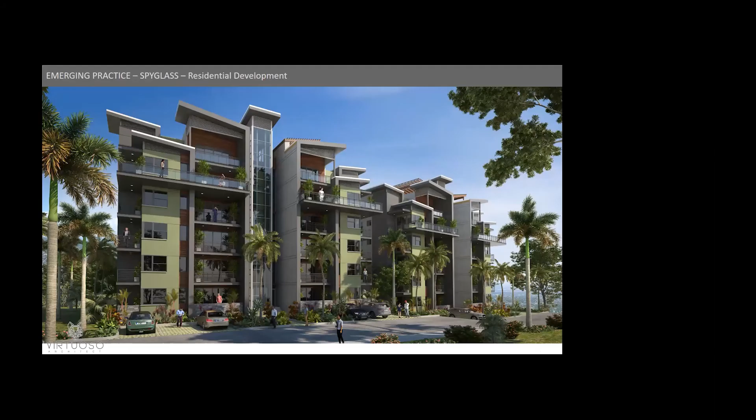This is Spyglass Hill, in the Barbican area, top of the hill at Tavistock. It consists of apartments and townhouses. A very dramatic project, and I can't wait to see the end result. We know it's going to be really dramatic, and pushing the envelope sometimes is something we like to do, and we're not afraid to do it.

This is another view of Spyglass Hill, now looking at the townhouses. The townhouses are the element on the front of the hill, and the apartments are towards the back. For the most part we did a lot of site sections, because the apartments are 6 stories, but we wanted to position them so that from the road you won't be able to see them in the back, only the townhouses.

So it climbs up the hill quite dramatically. You'll see the townhouses, which are 2 stories, but you won't see the apartments towards the back. It took us a lot of leveling and meeting with the engineers, really trying to work this thing through, because we didn't want to overpower the neighbors, number one.

So the townhouses flank the edges. The townhouses are what's against the neighbor's boundary, while the apartments are about 80 feet away from the boundary. From the road edge, you won't be able to see the apartments because they'll be hidden against that slope, hidden behind the townhouses.

We also tried to make the colors natural. We took some photographs and looked at the combination of green on the hill, and that's what we used to generate the colors. Yes, the colors may change at the end of the day, but this was the original concept, and I think for a massive project, we're able to nestle it into the hillside.

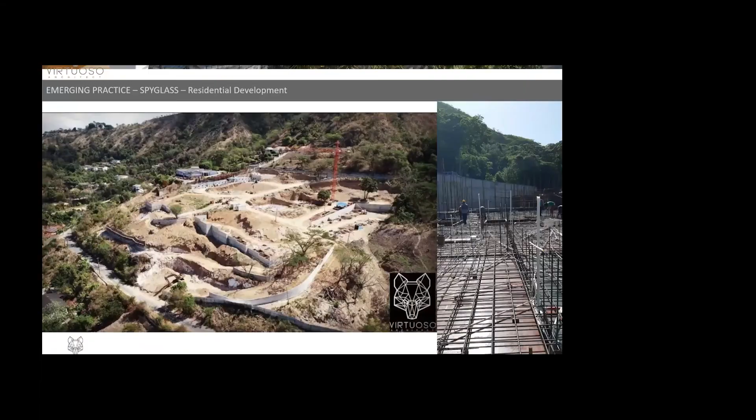This is a very dramatic view of the project, so you can really get an idea of the scale of it. But at the end of the day, once everything is finished and complete, we know it will be exactly what we want.

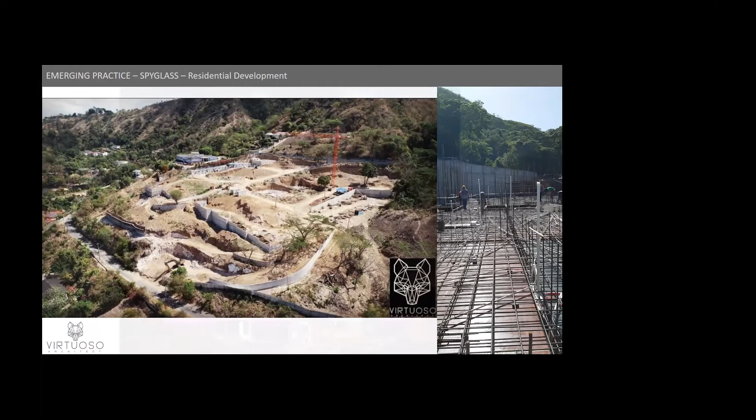This is our project that I'll be focusing on today. This is Belmont One, located in New Kingston, currently under construction. Here's another view of it.

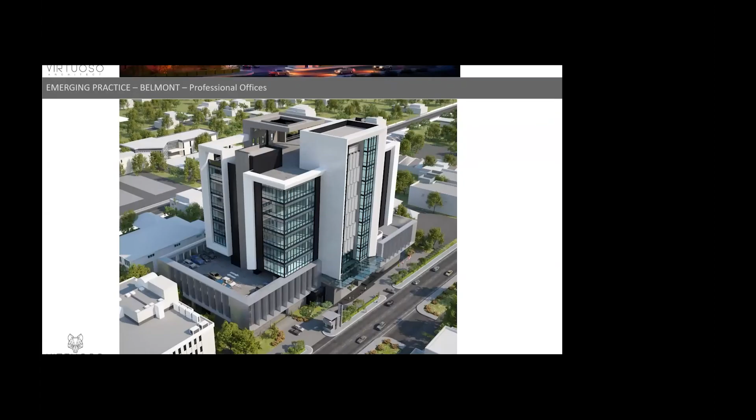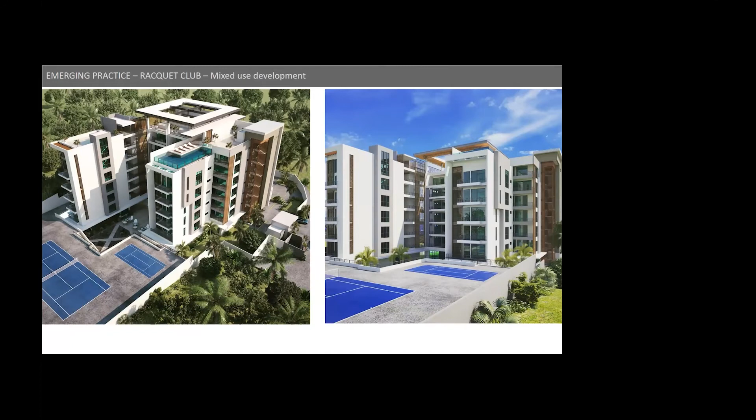This is a project which will be located in Montego Bay. It's called Racquet Club, and it's a mixed-use building, one of probably the only mixed-use buildings we have right now. So it's an apartment complex, 8 stories high, and it will consist of spas, gyms, shops, and other features. So it is Racquet Club, located in Montego Bay.

All right, so let me jump into the feature project, which is Belmont One, a commercial office project. Let me just give a bit of overview, and then I'll run through it.

Initially, Belmont was envisaged as a mixed use, consisting of both apartments and commercial offices. After the first design concepts and value engineering, the project changed to commercial only. Part of the reason is, by this time it's COVID time, we're thinking about dollars and cents numbers. Apartments are more expensive to execute than commercial spaces because you can do those as shells. So once we looked at all of that, return on investment, it made sense after much meetings to change it to commercial only. The design concept is to maximize views, even though the project is slightly skewed.

It is essentially aligned east-west, so the long side of the project is on the east-west, which is not really what we want, because we know about climate and sun angles. So it's not the most ideal situation, but we didn't really have a choice as to how the building would be positioned. So we had to use some strategies to mitigate against solar heat gain.

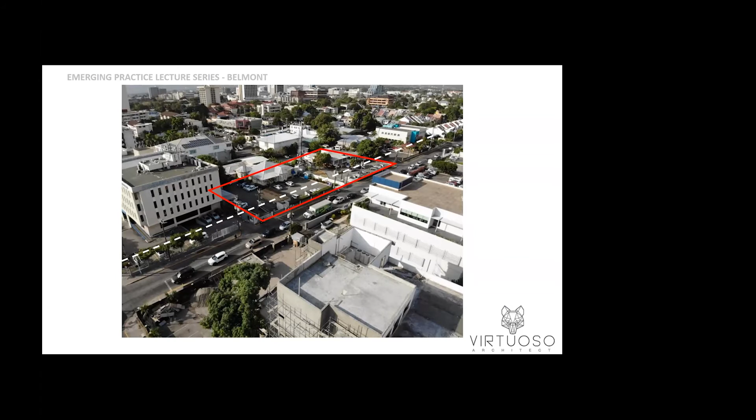This is the actual survey, showing what was on the site, and the red line shows where we're going to position the building. The area of the site is 1.02 acres. The total building size is approximately 185,000 and change square feet, or 17,000 and change square meters. The floor area ratio for this building is 4:1. We have 9 floors, with 4 parking levels and 5 commercial levels, as well as a roof amenity space.

As you know, the calculation for parking, especially for commercial, is quite a bit, so we have to ensure that we can take care of all the parking efficiently and effectively, without taking away much from the building, because all the parking is on site.

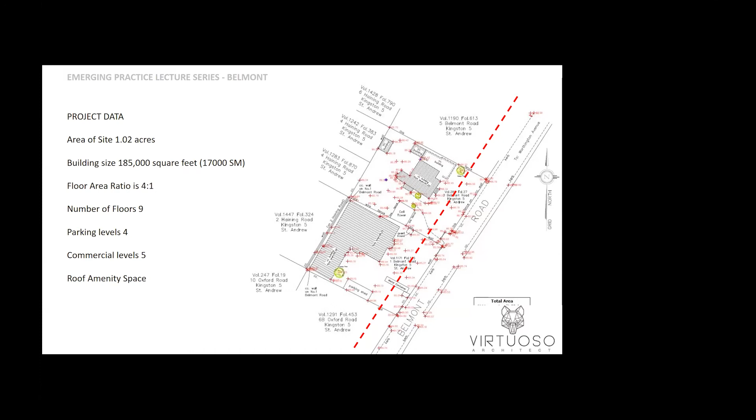So essentially the ground floor, basement level, and parking levels maximize the site — we push right against the boundaries to maximize it. We don't want a basement that is totally sealed, so we came off the edges to create light wells and air wells going down into the basement levels, so it can breathe. We want to ensure the basement cars vent their exhaust and that the air can move through effectively.

What's important — I know some students are on the stream — when you're setting structures out, especially when you have parking to consider, is that you have to ensure you have a proper grid. Your grid spacing must be such that the parking can happen, and that your spans aren't too long.

So what we have is a 26-foot span on the long side, and different spans on the shorter edge. Those 26-foot spans ensure that we have 3 parking spaces between each of them, which is very effective for setting up the parking and also the structure. You have to be mindful of that, so you don't have to do a lot of structural gymnastics when coming on top of a parking structure.

I just jumped to the second floor because I wanted to show the outline of the building itself. The building contracts at the commercial levels and expands where the parking is. This is not something we thought of initially when doing the design, but in a sense it started to feel like — and a business partner suggested it — a harpy eagle with its wings spread out and a center spine. So we played with that idea.

This is the basement level, which is interesting to focus on. There are a lot of challenges in buildings, and in Jamaica I circled these areas for a particular purpose because I wanted to highlight it: for safety, the escape stairs must not go down to the basement — it has to be separate stairs that go down there. So I highlighted the core here: you have 2 stairs at either side, and those only go from ground floor to basement. The other stairs terminate at ground floor and don't run all the way through to the basement level.

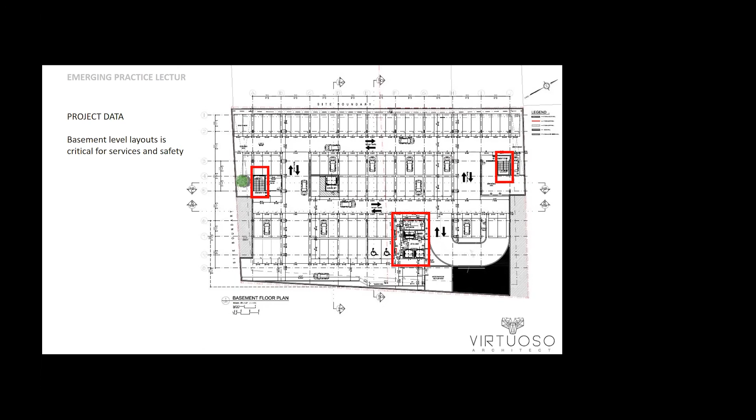I have a little 2-minute video that I'd love to play. So let us run through some images, interiors, and I think this is the video — we have a little 2-minute video of the project.

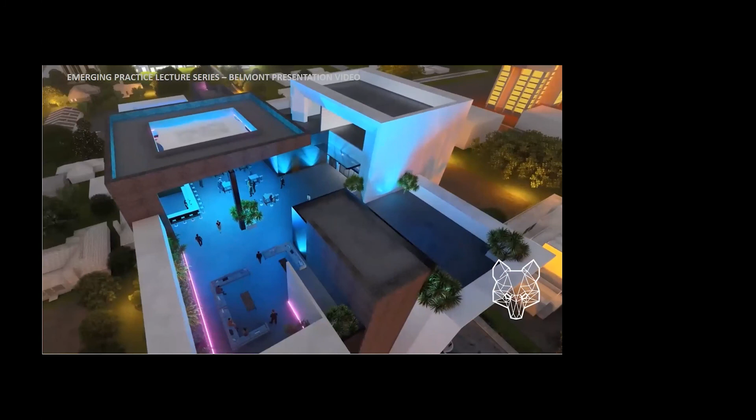So that's it. Thank you.

Sorry about that time crunch at the end there, Hugo. No problem at all, it's fine. But I appreciate it. Thank you so much for joining us for the conversation.